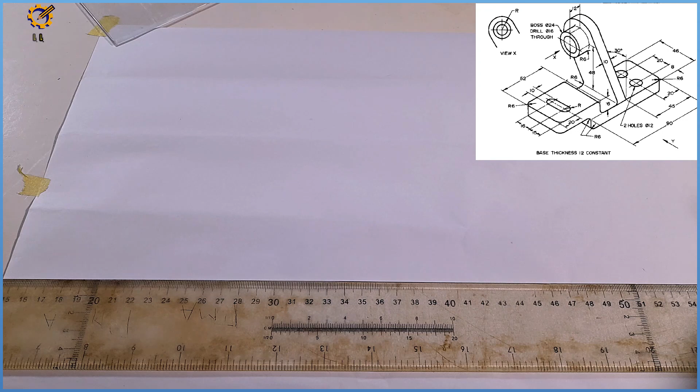So to draw my end view, picking my pencil, I'm going to draw this line at the bottom like this, horizontally. After that, with my set square and T-square sitting perfectly, let me do it somewhere around this side. Let me create a vertical to it, faintly, like this.

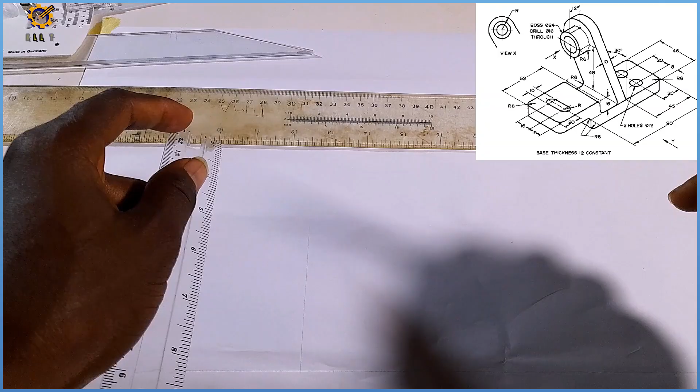So the next thing is I'm going to pick my ruler. Now if you're looking at it, you're told the base thickness is constant, and it is 12 mm. So if the base is 12 mm and the other area is 16 mm, that's 12 plus 16 equals 28, but I'm going to measure them individually.

So this is my 28, mark 28. So from here, 16 at the top, 12 at the bottom. And the area is taken.

Then on the horizontal plane, the total width is 46. So I'm measuring from right to left at a mark of 46, which is this. So each of those areas, I'm going to project them.

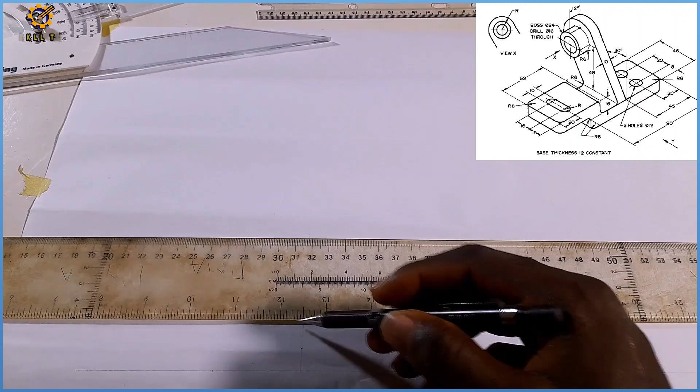So first the 12 and 16 horizontally like this, faintly. Then like this also, faintly, with my T-square.

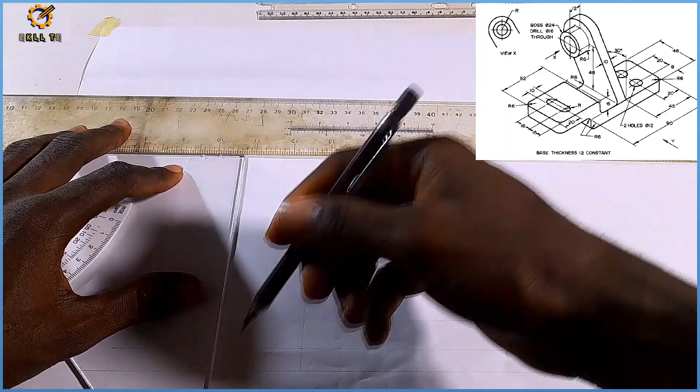Then the mark of 46, I'm going to be drawing that vertically like this, faintly. After doing that, what's the next thing for me to do?

Okay, let's start dealing with stuff here. So on this mark of 16, this is thickness of 16.

So first of all, we have a mark of 15 from the edge, which is this. So it is on that mark of 15. Then we have radius 5, that's the diameter, then radius 5. I measure it backwards here like this, so take note of that.

From here also, 15 from here, 15 from here also. That will be 15, and radius 5 also like this. So because you're having a web right there.

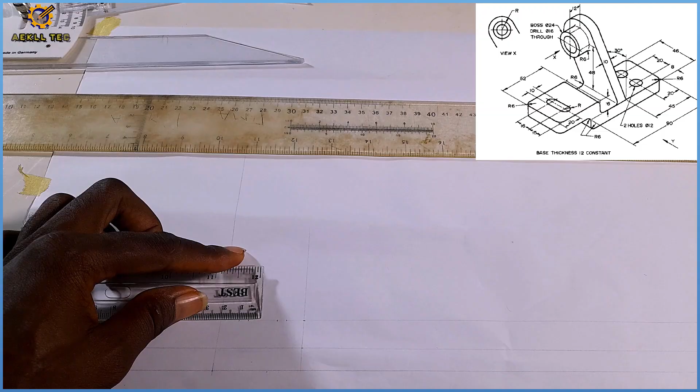And I'm going to get the midpoint of this 46. Half of 46 is 23, which is this. So each of those points will be projected vertically, but it's going to be faint. So take note of that.

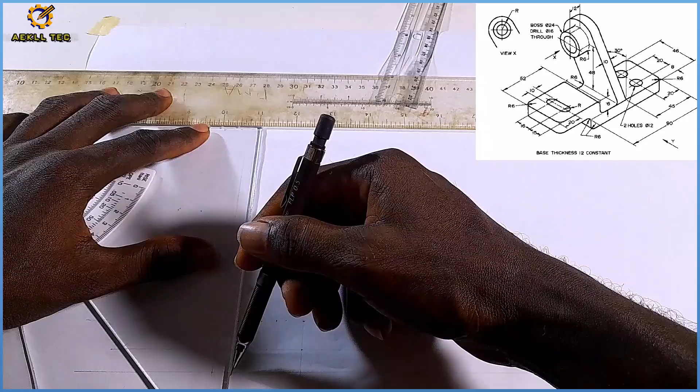So I'm projecting from left to right, right here, faint lines like this. Machine drawing has to do with a lot of lines, so you must know how to project. If you can't project, you might find it hard.

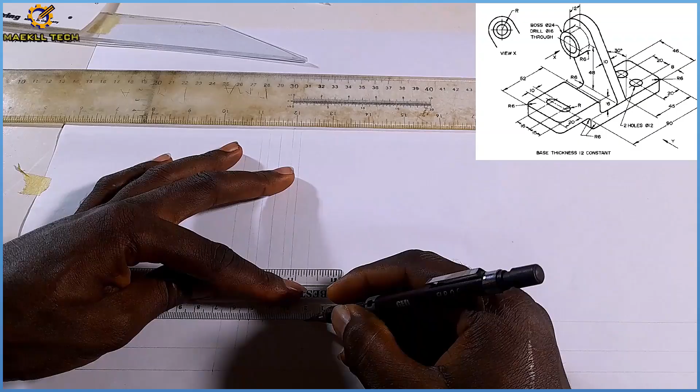And after projecting all those areas, this place there won't be anything, so I'm going to thicken this like this, and thickening that area like that. I'm going to thicken this place to like this.

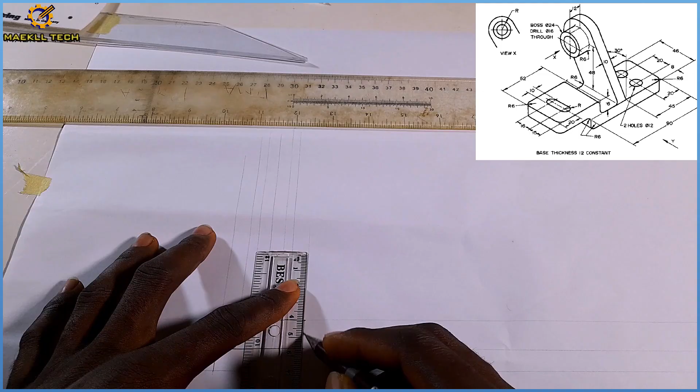Okay, so I'm thickening this from start to finish like this, and this also like this. All right, so this is going to be hidden. This is going to be hidden. This is also going to be hidden. This is going to be hidden. Okay, so I think those areas are being sorted like that.

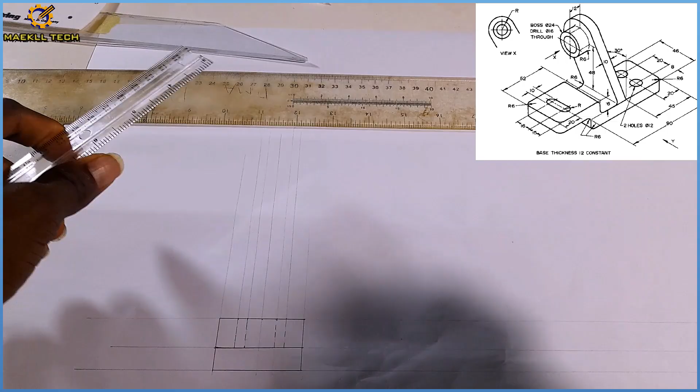Okay, now at the base, if you look at the hole where there was at the base, that was labeled 46. The center to center of the holes there is 20, and we have two holes of diameter 12, and the center to center is 20.

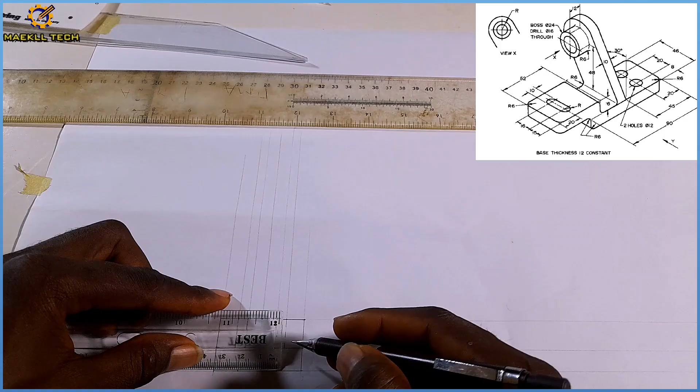So from this midpoint now, I'm going to pick 10 from the center, 10 to my left, 10 to my right, which actually makes up the 20. And the hole there is diameter 12, which is going to be radius 6. So from here, 6 plus 6 equals 12. Then from here also, I made a mistake, 6 plus 6 equals 12 also.

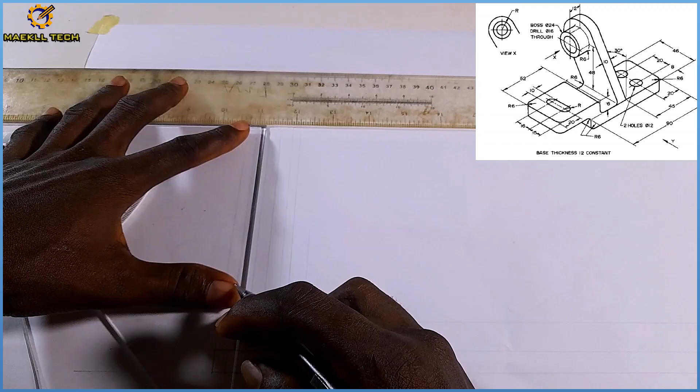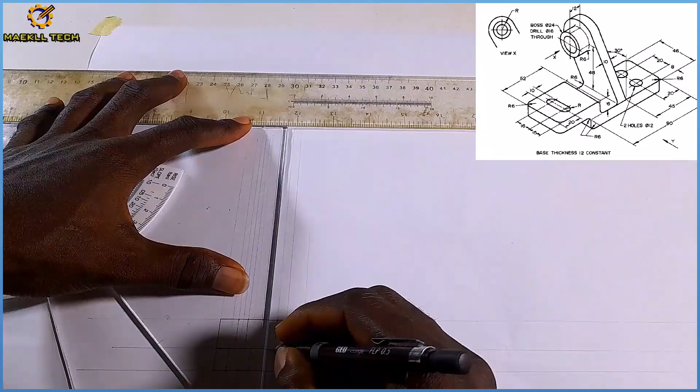So each of those points also will be projected vertically. This one is going to be hidden right here. This one will just be a faint line like this. This one will also be hidden right here, faint line like this. This will also be hidden right here and faint line all the way to the top.

And this one is going to be a faint line to the top like this, and this is also going to be hidden right here, faint lines to the top like that. Okay, so after doing all that, I think we are progressing, right?

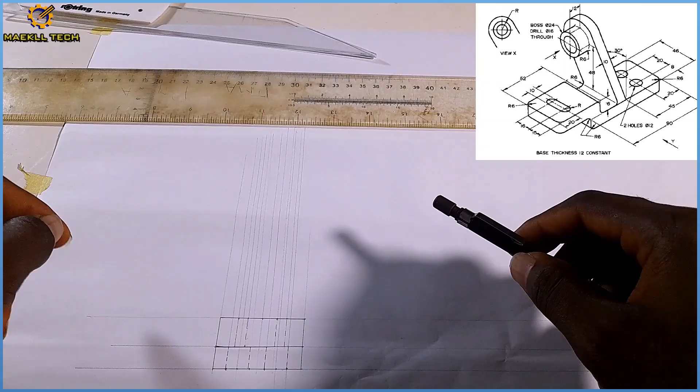So from this area, this L was tilted at an angle of 60 degrees to the horizontal, 30 degrees to the vertical. 60 degrees to the horizontal, 30 degrees to the vertical. I'm going to do that now. So with my set square, I'm using the adjustable set square, already adjusted to 30 by 60.

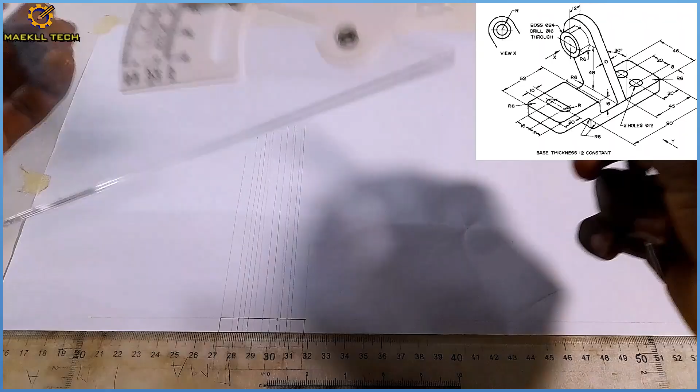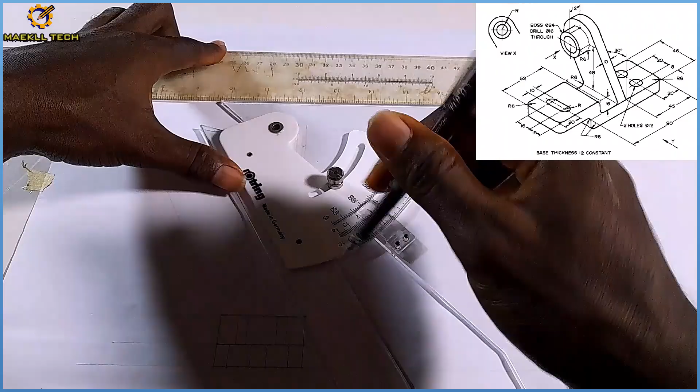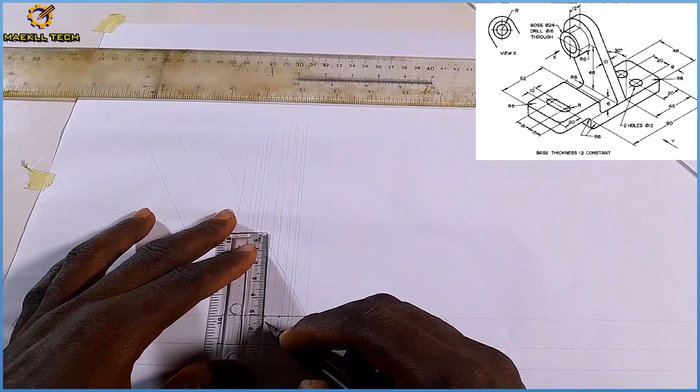So the center line, which is this, the mark of 23, I'm going to move down also 60 degree, all the way up like that, PM. So after drawing those 3 areas, take note, you're told that the vertical height here is 48, where the middle of the cylindrical part at the top is 48. So from this center, I'm measuring 48. So with 48 right here, PM, vertical height, I'm going to project it horizontally.

48 right there, projected horizontally like this. So this is where it intersects that middle line. And from where, I think I saw where I actually made a mistake. Yeah, not a mistake per se. So I'm going to draw this at angle 30 degrees like this.

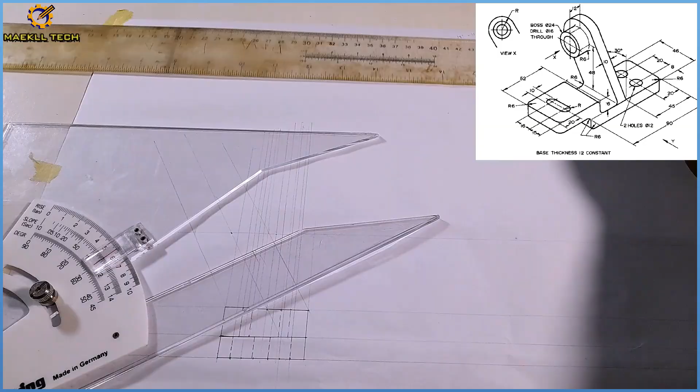Okay, at angle 30 degrees like this. So with my 30 degrees, I slide all the way to this junction, then I draw this like this. That's at 30 degrees like that. So after drawing that at 30 degrees, I pick my compass.

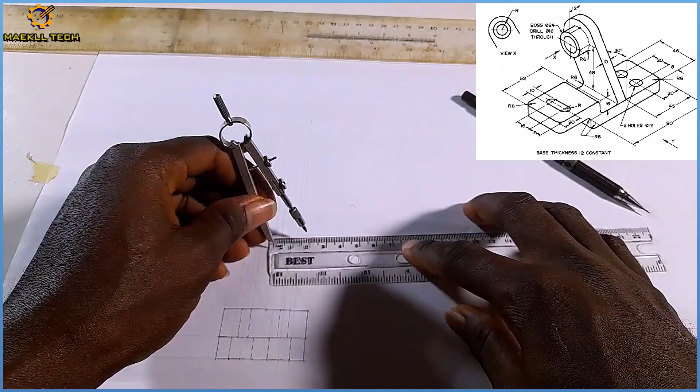Picking my compass, I adjust it to this junction right here, then I draw like this. I draw like this, you see that? So then the next distance on the inside, I'm having diameter 24, that will be radius 12. Radius 12. Radius 12. With radius 12 right here, I come here, then I draw this circle like this. With radius 12, I draw that circle.

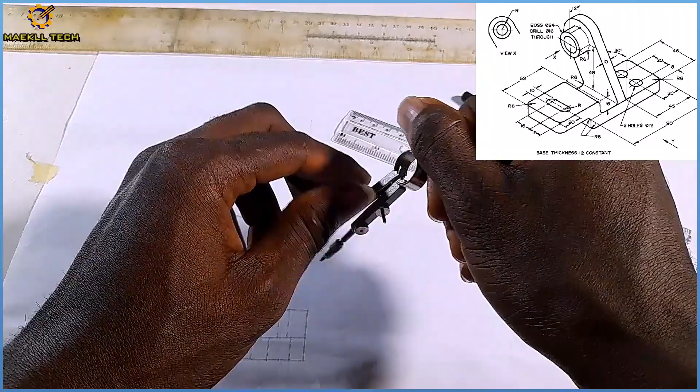And on the inside, diameter 16, that will be radius what? Radius 8.

So with radius 8, which I pick now, I'm coming here. I'm drawing this also, radius 8, I'm drawing that. So after doing that, I can thicken this all the way to the top like this, and this all the way to the top like this.

And the area is settled. I have my end view perfectly placed like that. So with that, area actually got in. What's missing? Nothing is missing. We are good to go, very, very good to go.

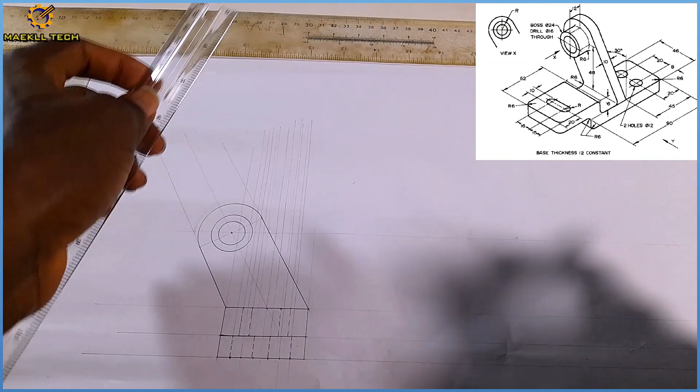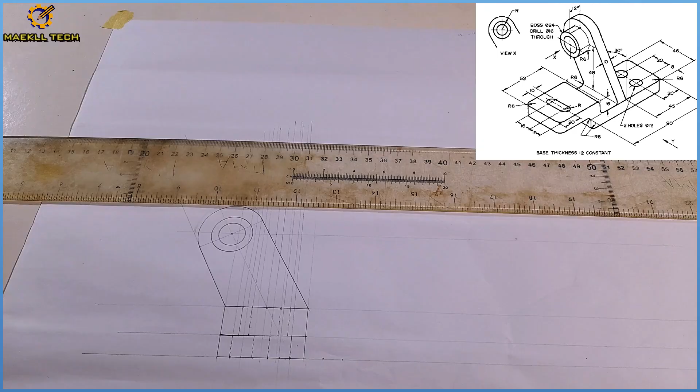So with that area settled, I'm going to, from the base here, step off 10 two times, 10 and 10, to actually get my orthographic plane. So after doing that, I'm going to from the highest point here, project this also horizontally like this.

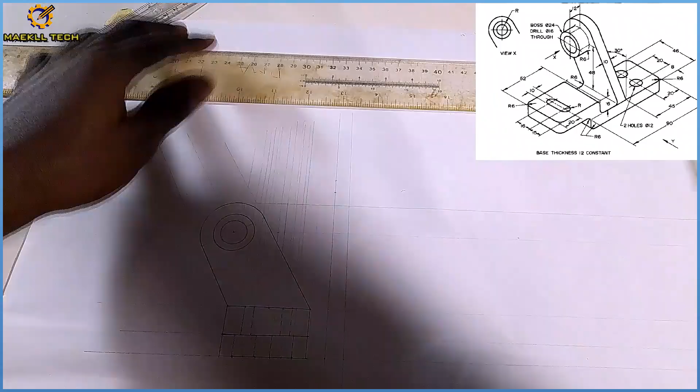I'm going to project those points of 10 which I marked earlier, vertically, 1 and 2. Now from here, I'm stepping off 10 twice also, 1 and 2. But before that, I need to project this also, this right here like this. So after that, I can now draw this also horizontally, the first mark and the second mark.

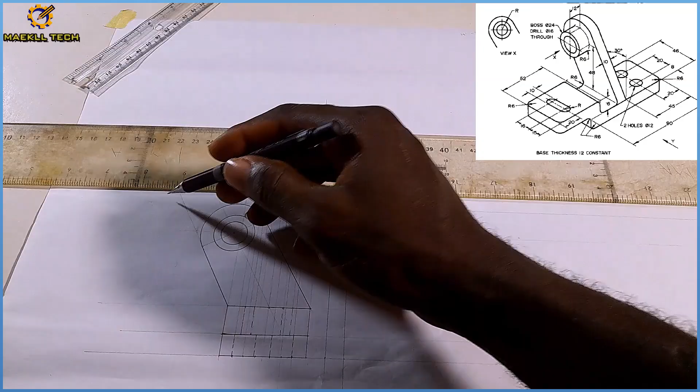So from this mark of 52, I'm stepping off 12 towards my right hand side, 12 right here. Now from that 12, I step off 12 from this 52 towards my left hand side. So from this mark of 12, I'm going to step off 90 to my right hand side. From this 12 now, I'm having 90, which is this.

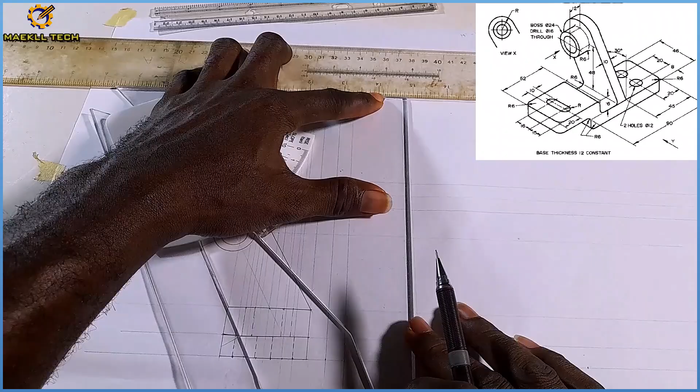Now with those points gotten, I can actually project them vertically, faintly, right? So we just do them like this, vertically like that, like this, faintly, and like this also faintly. So after doing that.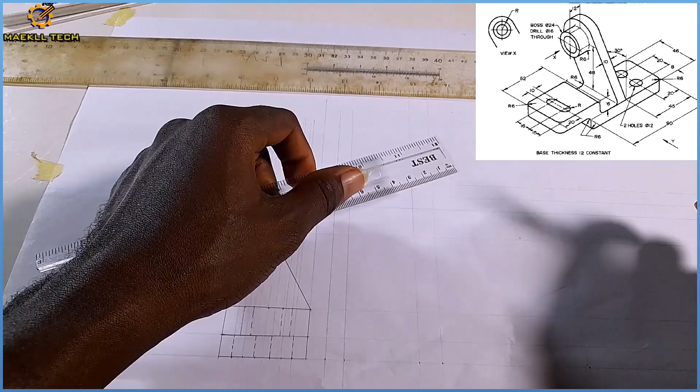Yeah, so radius of 6 here. I said I'm going to show those radius of 6, so let me fulfill my promise. Radius of 6, that's kind of small, God help me. Radius 6, so somewhere here, from here I mark 6, then from here I mark 1 and 2. So with the intersection gotten, I can confidently draw the radius 6 here.

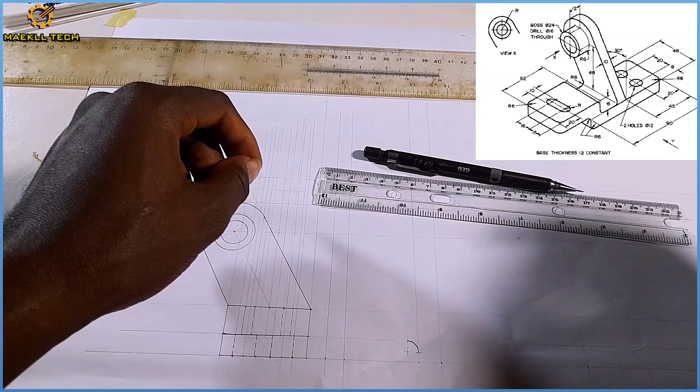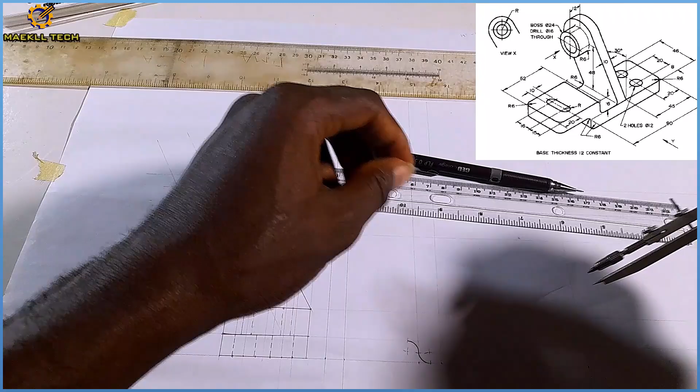I think that one is settled. So likewise at the bottom here also, 6, then 6 and 6. So at this junction also I can confidently draw radius 6 like this. I have that area settled. So I think on the inside here also, right here 6, 6. So from here 6, 6. So from the intersection right there I have this radius 6 settled.

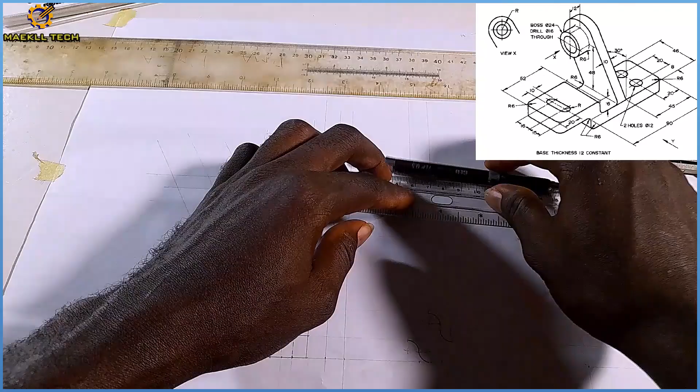So it comes here also like this. So from this junction 6, 6. Then from here 6, from here 6, and from this intersection I have radius 6 gotten. So with those areas gotten, I can close this up here like this.

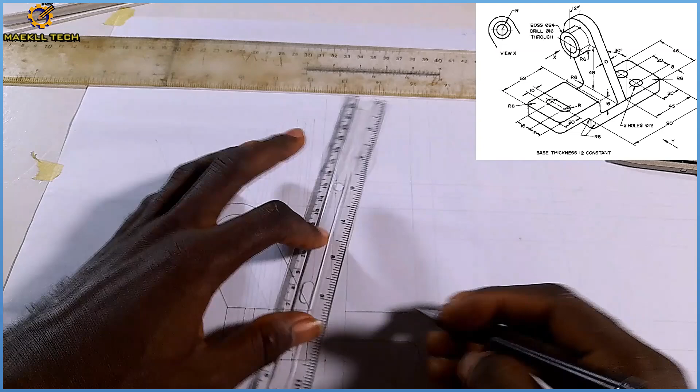So the area closed up like that, this area closed up like this, then like this. Then at the base here, this place like this. All right, so I'm managing this. So this comes all the way down here like this, and this comes all the way down here like this. Then this connects here like this. So I think that's how the area is actually looking like. Am I right? Yes, I am absolutely right.

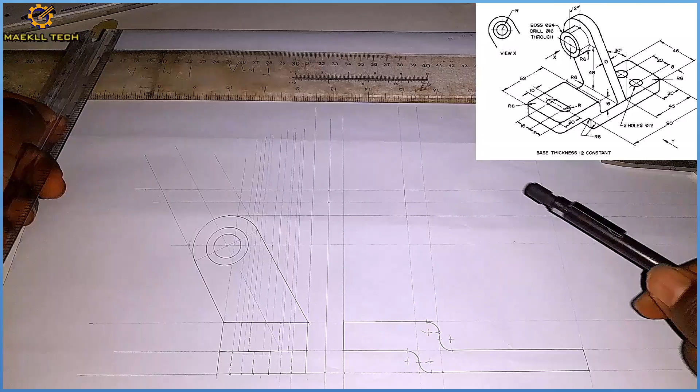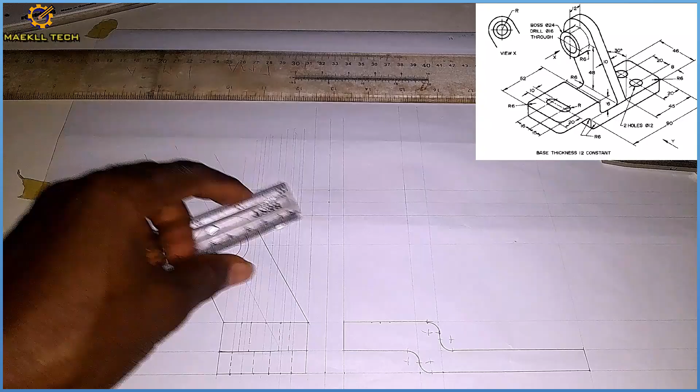So we have some hidden details to actually sort out here. From the edge here I'm having mark of 20, which is this. From this mark of 20, the radius is 5, diameter of 10, so 5 left, 5 right on that side of this thing. So I'm going to show that vertically like this. I'm drawing it faintly first of all from the top, like this, and like this.

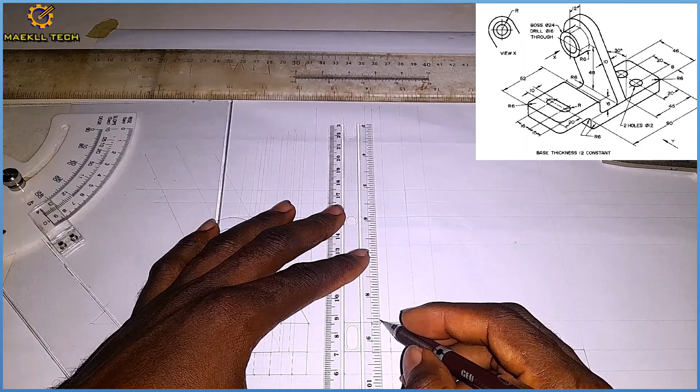So this one is going to be hidden like that, and also hidden center line here. Okay, I think that slot is settled.

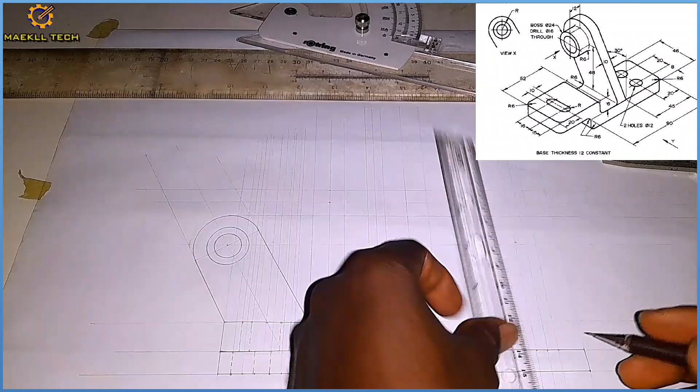Now towards the bottom right here, mark of 20, then diameter of 12, that will be 6 to the left of that mark 20 and 6 to the right of it. Okay, so I'm going to project those marks first of all vertically, faintly. Like this, faintly and faintly. Okay, so then hidden line here also, then center line here. So that area is also sorted.

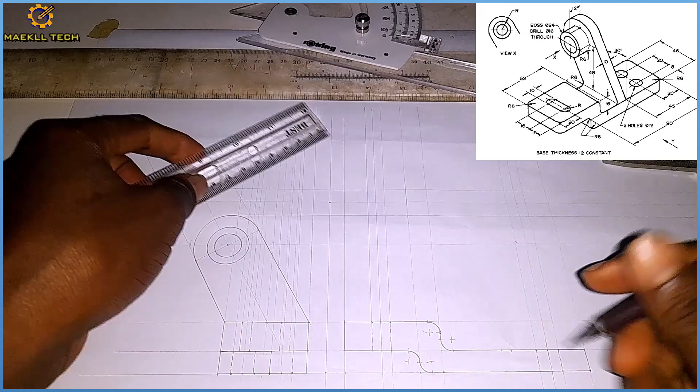Okay, now from my bottom right towards the left, I'm having mark of 45 first of all. So this one is not it. It is this mark of 45 right here. After the mark of 45, the thickness of that web is mark of 10. From 45 towards the left, I mark 10. So those 2 points, I'm going to project them vertically, mark of 45 and mark of 10.

So after doing that, I'm going to close this right here like this, thicken them, then project this all the way to the top like this, thick, and this also all the way to the top.

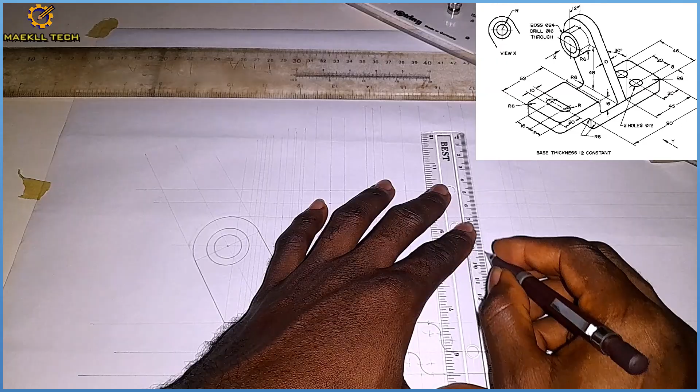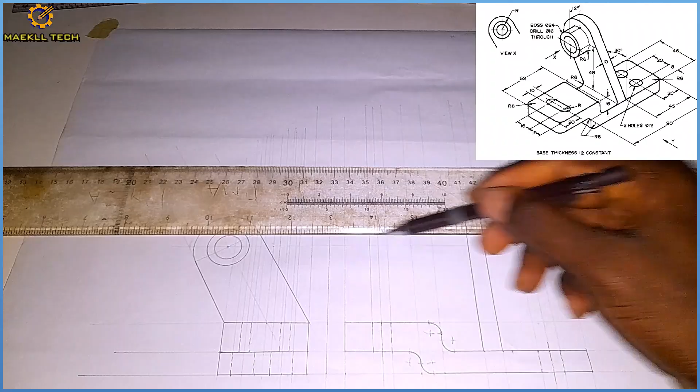Now after drawing that part, I'm going to project this horizontally to get my points. So this big circle here, I project it faintly horizontally, and the inner circle horizontally. Then this also horizontally, then this also horizontally. Now after doing all of those, mark of 12 from this edge, I'm measuring 12 outside here like this, then I'm projecting that vertically like this.

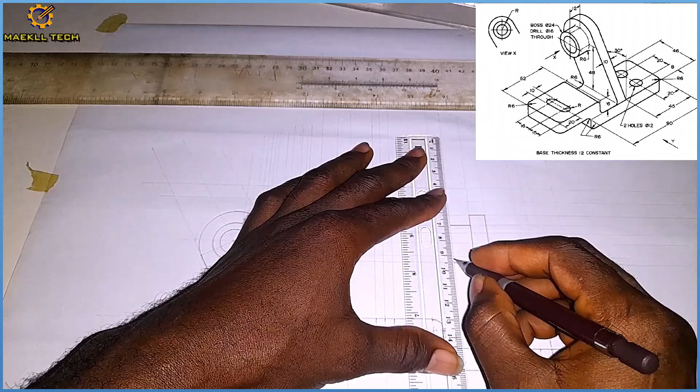Okay, vertically like that. So after doing that, I can now confidently thicken this like this, this like this, then I'm going to thicken this like this. Now we're told that this hole on the inside is drilled through, which means I'm going to make it hidden line through like this and like this.

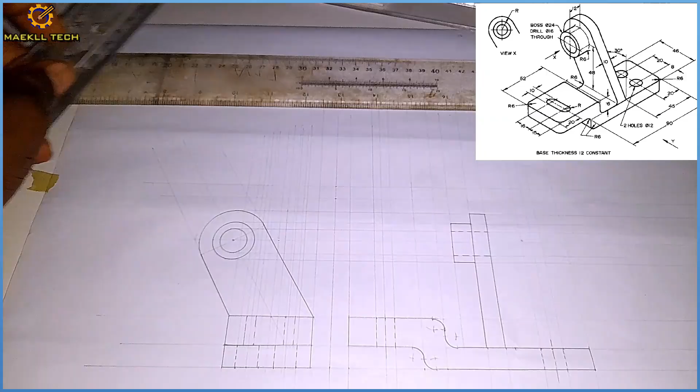Okay, so center line, obviously. Let me just do the center line with the set square, sorry, with the T-square. Okay, so the area is also settled like that. So I think I'm done with the end view, I'm done with the elevation.

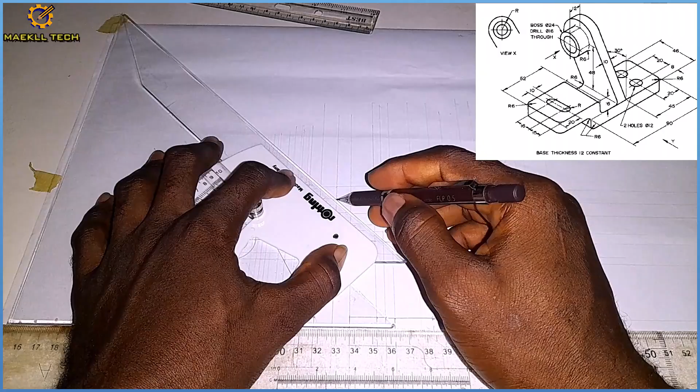Now is the plan, and the plan is going to sit directly on top of the front view. So before I draw that, I'm going to project 45 degrees from this middle. So I can do it like this. Okay, so from this middle at 45 degrees, I draw. 45 degrees, I produce that line.

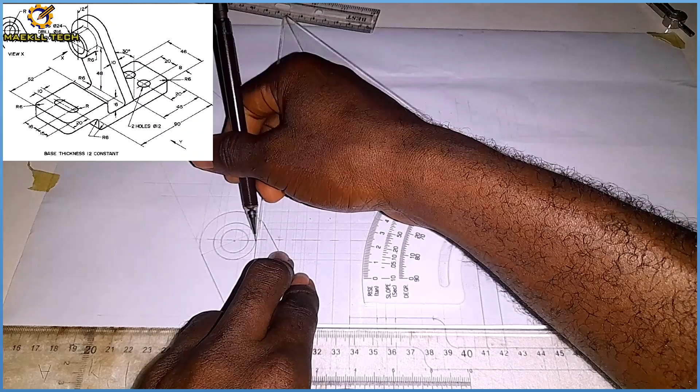Then I'm going to project the end of this like this to where it touches that 45 degree. Likewise all these circles here to touch the 45 degree, then this to touch the 45 degree, then the middle right there, then the other end of this circle right here, then this right here.

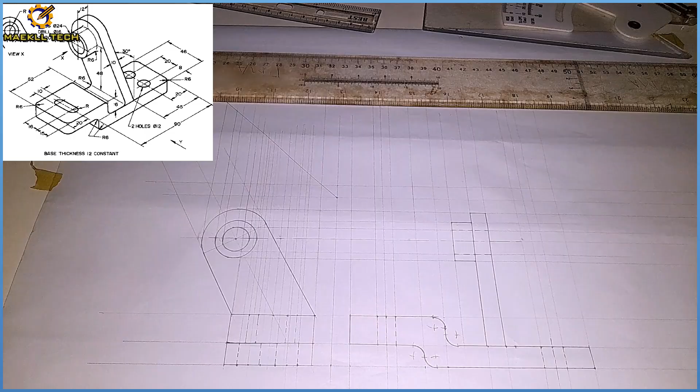And this mark right there. So after doing all of those, I'm going to project them horizontally, like this, horizontally like this. Okay, so after projecting each of those points to this axis, I'm going to thicken the plan. So here to here, I'm thickening it like this.

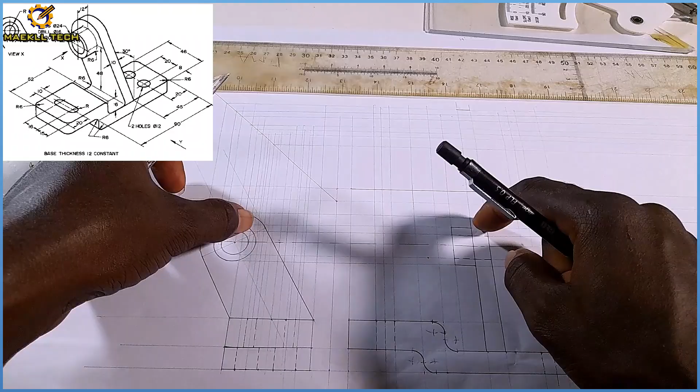After thickening it, this web you are seeing here, I need to actually show it on my plan. And this web you are seeing, this is it here. So the end of it is this last line, which is here. So I'm thickening it like this. Okay, then also the other end of this web, I think I projected from here, right? Oh, I didn't project it. Let me project it.

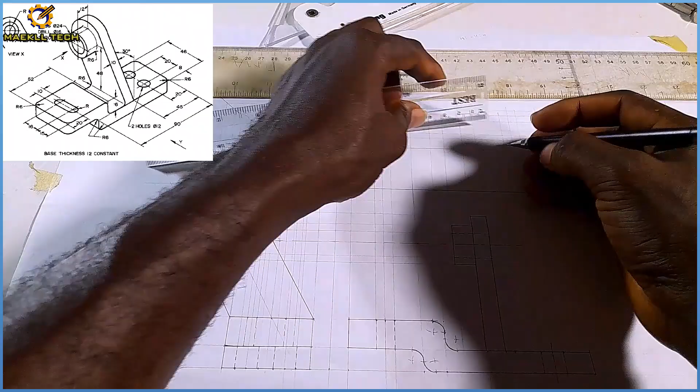Okay, 1 and 2. So I think the end for it is here. Yeah, it is here. Okay, and now coming all the way down. So I'm still going to thicken this, don't worry, all the way like this. And this also like this.

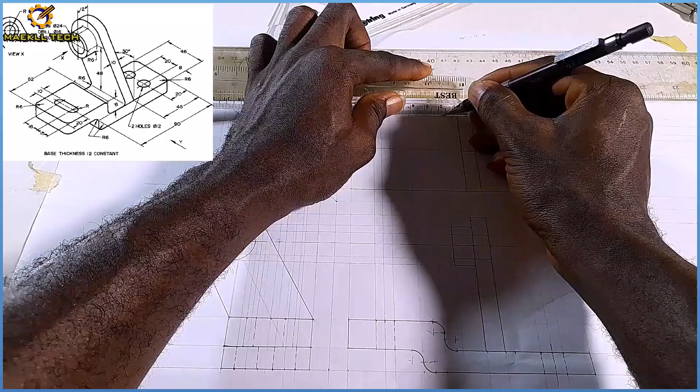Okay, so after doing all of that, it remains this circle on the inside. So the first edge of that diameter 24 is this. Come here, right, and the second end of diameter 24 is this.

Don't make a mistake. Is this? I'm trying to trace it with my ruler. Second end of diameter 24. Oh, I haven't drawn it. So I'm going to project it. Hey, is it straight? No, I did rubbish. Sorry.

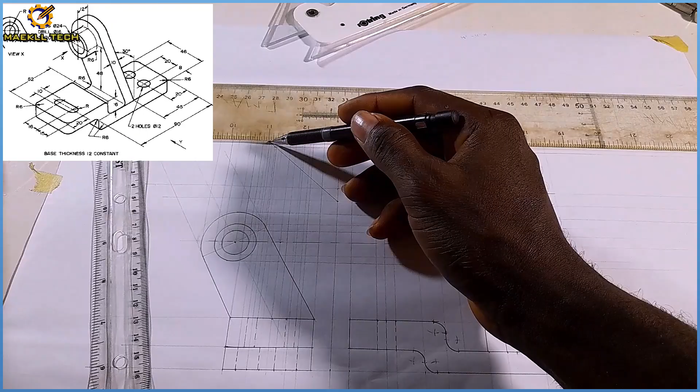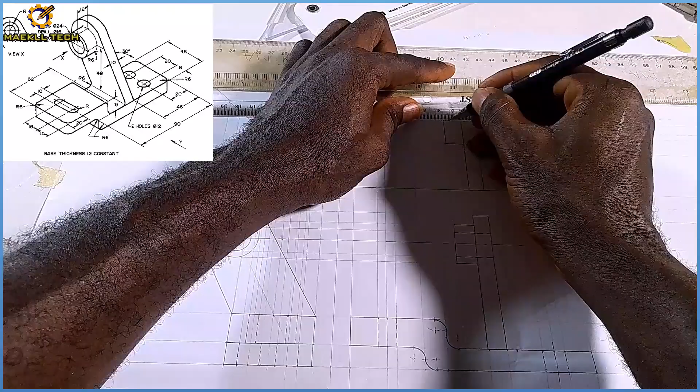Is it? Okay. So this is the second end for diameter 24. Then I take it in. Okay. Now the diameter 16 hole on the inside. This is the first end for it, so all through it's going to come like this. Okay, the second end for it is this, and it is here already. That's the advantage of you tracing.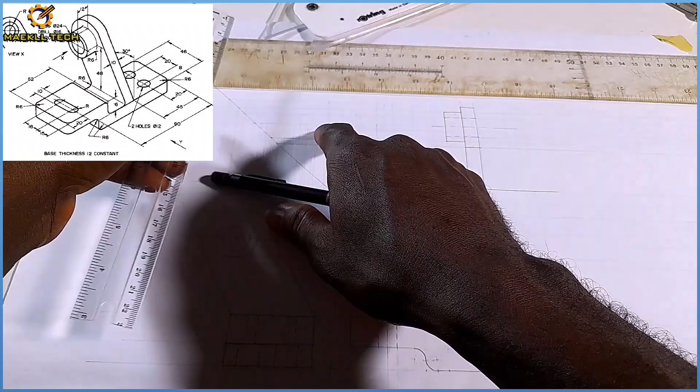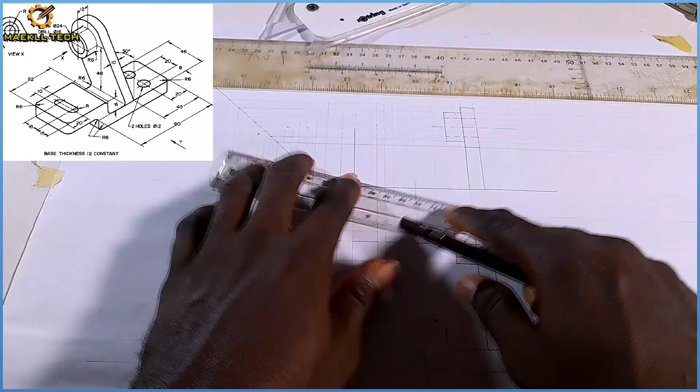You need to start measuring up and down. Okay, then obviously our center line, which is this, I'm just going to do that. Okay, like that. So after that has been sorted, the other end here, which is this. So I'm taking this one. This end here goes here, so that I don't make a mistake. So with my ruler, I take this all the way to the end. Yeah, I'm correct. Then it comes all the way to this place like this. It's passing through here, to be hidden. Then it's bold here, visible.

Why is my hand shaking? I've eaten this morning now, right? Yes, I've eaten.

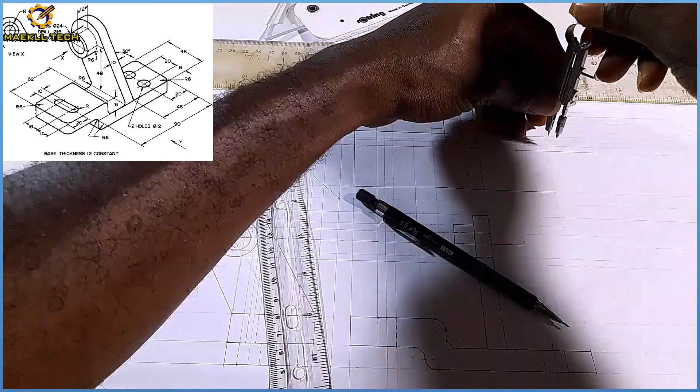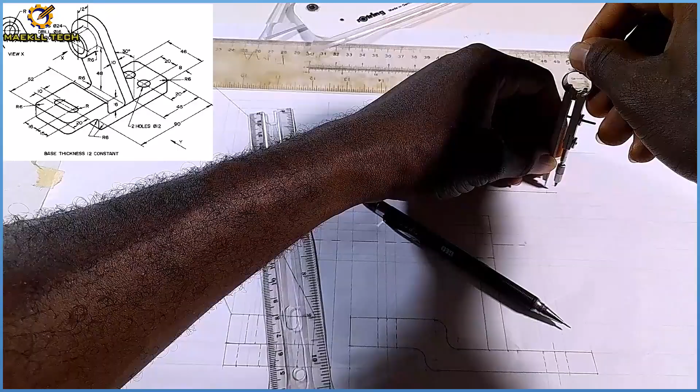So that is sorted, and oh, radius 6. I'm still going to come and do the radius. Shouldn't have taken those ends. I said I'm going to do the radius 6. So with 6 on my compass, radius 6, radius 6. Then from here, radius 6 right there. Then from here, radius 6 given right there. So I'm connecting this all the way to the arcs and to that and to that. So radius 6 set there. The radius 6 should be here also, but I've drawn it, don't mind me. I promised to show it, so let me fulfill my promise.

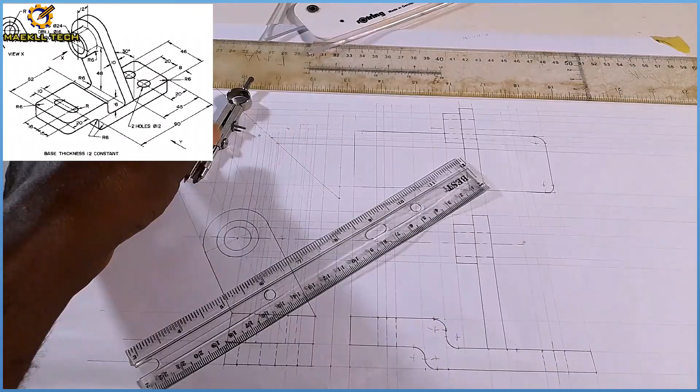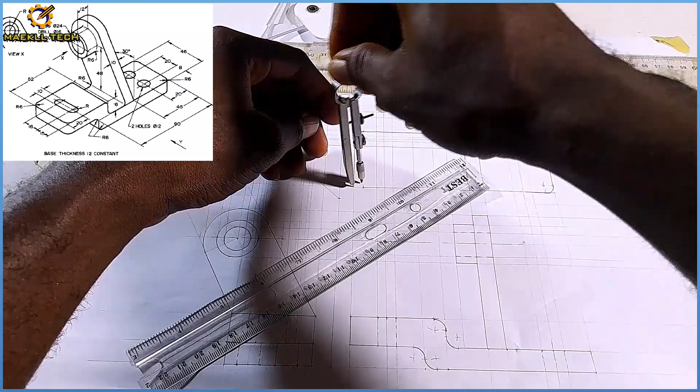Alright, so still radius 6 on my compass. Radius 6, radius 6 from the intersection. Radius 6. So from here they meet like that. So closing this down like this, then like this. Okay, so I think it's sorted like that.

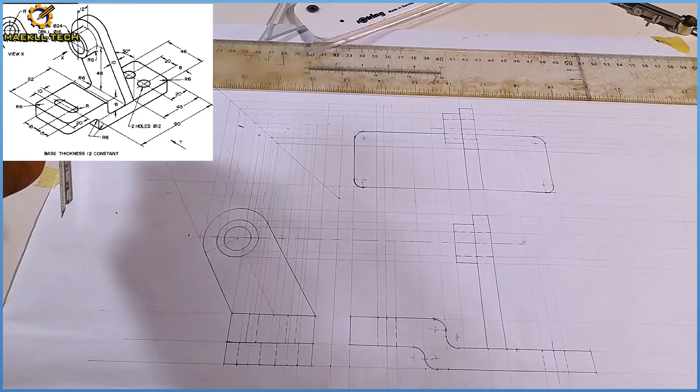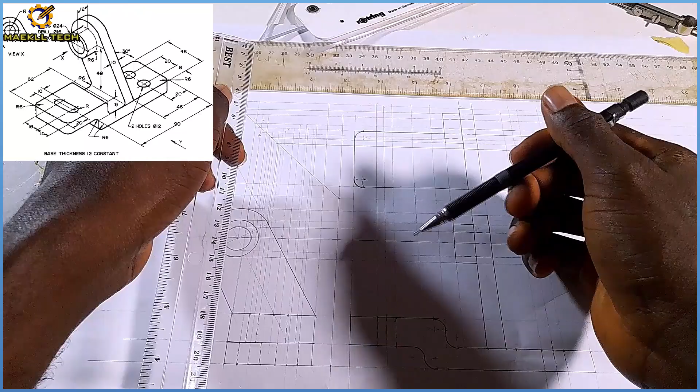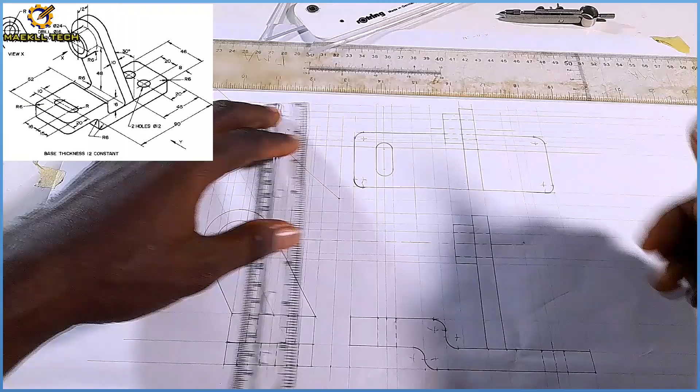Okay, what next? The holes. Yeah, this slot. So the slot is here, right? Check. Yes, I think I'm correct with that. So since I know this is the line for that slot, and it's 15 from the left, 15 from the right, from here I pick 15. I got the midpoint. From here also I pick 15. I got the midpoint. Diameter 10, and that's radius 5. Just adjust my compass to it, then draw like this. Then from here also I draw like this. Then I pick my ruler and align, and I join like this and join like this. You see, settled.

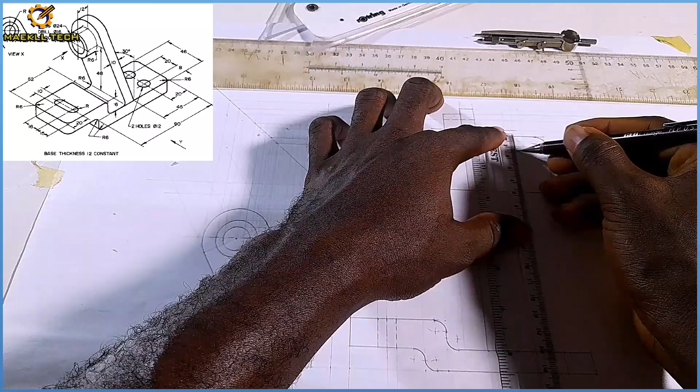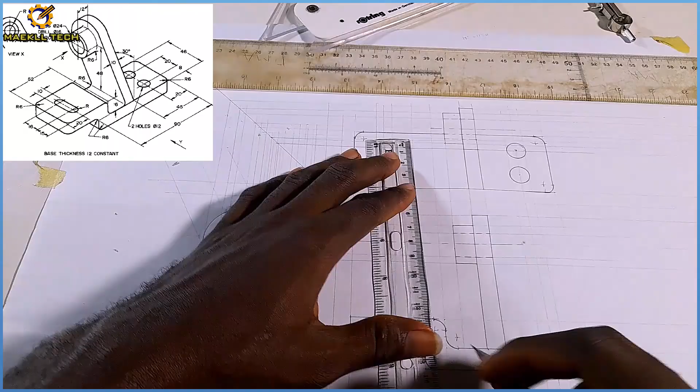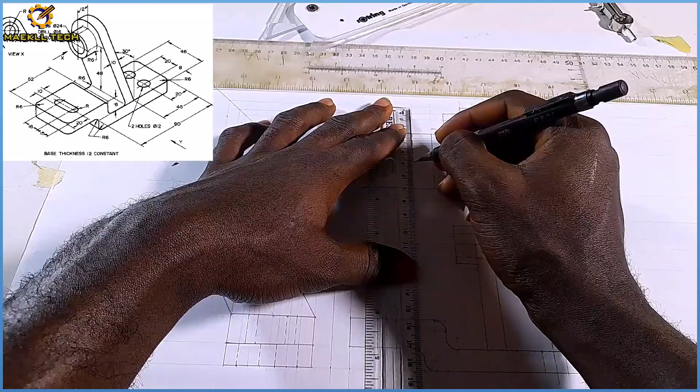So on my right hand side, 46 minus 20 is 26. 26 divided by 2 is 13. So from here, just measure 13 right here, 1, and 13 right here, 2. So all I have to do is just place my compass, adjust, and draw my circle of diameter 12 first, and all the way for the second. Okay, so after doing that, right here is going like this. Then this place is going to be hidden, because we are told to show all hidden details.

What else? Anything found wanting before I call it a day? All right, I think that is it. Cheap like plantain chips. Easy as ABC. So this is my end view, this is my front view, and this is my plan. So that's the working drawing of that angle bracket in third angle orthographic projection.